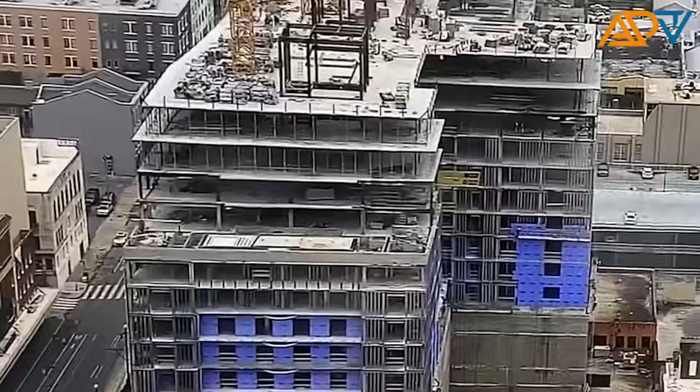Faulty constructions that cause severe disasters for people. Because of the negligence and corruption of those in the government, incidents like these are unavoidable. And what's even more horrifying is that it claims many lives.

In this video, I will show you the biggest construction failures in the world. Here, you'll see a building that was expected to last for hundreds of years, but suddenly collapsed in just a few seconds. You will also see bridges that everyone thought were safe, but suddenly gave way in the middle of rush hour. And that's just some of what you'll witness.

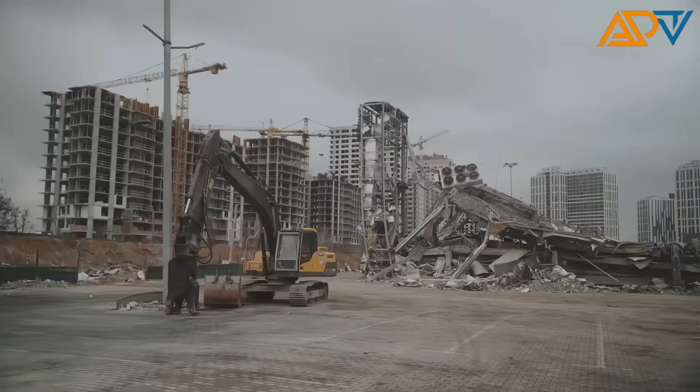Because of this, we've prepared a lot of entries about construction failures.

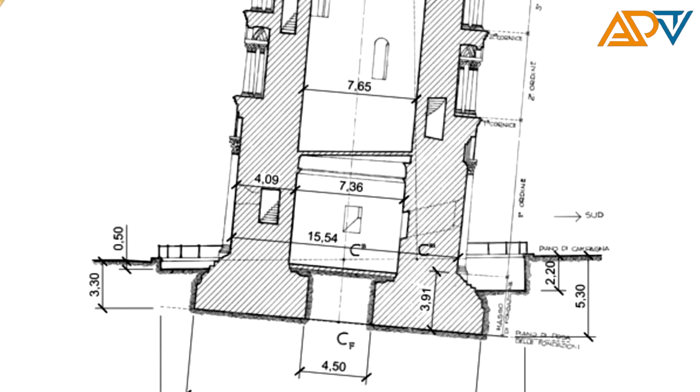That's when the tower started to lean. And even before it was completely finished, the flaw was already obvious. It was tilted or leaning. Because of political unrest and the wars that happened, construction was halted for almost a century.

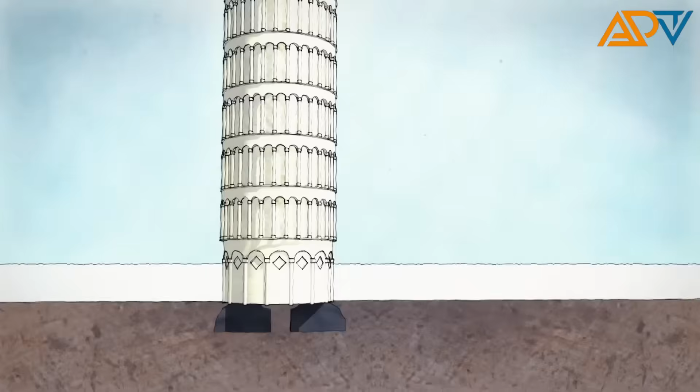And in a way, this actually helped. The ground had time to gradually settle. That's why the tower didn't collapse right away. But as construction continued, the tilt actually got worse.

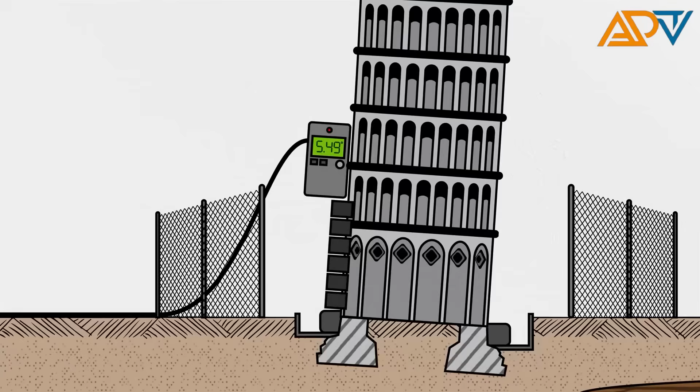In 1372, after almost 2 centuries, the tower was finally completed. But it was no longer straight. It now had a permanent tilt that became its trademark. As centuries passed, the angle of its tilt became even deeper.

Experts have tried several times to fix and stabilize the structure. There was major restoration until the 1990s. Starting in 1993 and lasting until 2001, they used modern engineering techniques to reduce the tilt and ensure that it would not completely collapse. As a result, what was once considered a major failure became an extraordinary symbol of Italy.

Imagine, a construction mistake is now visited by millions of tourists every year. The Leaning Tower of Pisa reminds us that even the mistakes of the past can become masterpieces in the present, admired by the whole world.

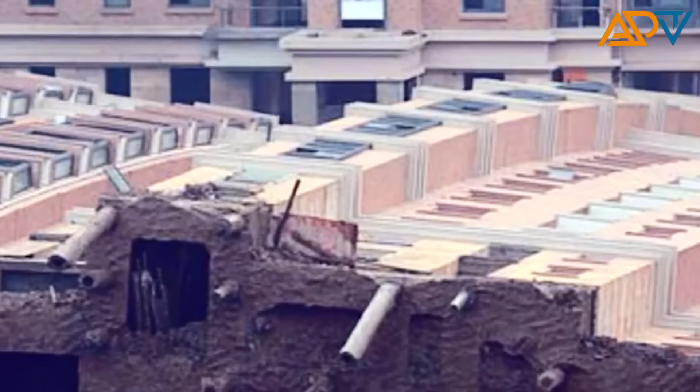Lotus Riverside Complex, Shanghai. In 2009, one of the most dramatic construction failures in modern history made headlines around the world: the collapse of a building at the Lotus Riverside Complex in Shanghai. It was like a giant domino slowly toppling over, shocking and terrifying.

The Lotus Riverside Complex was built as a symbol of China's modern urban progress. Sleek and tall buildings were planned to serve as homes for the middle class and families seeking a new life in the city. But on June 27, 2009, one of the high-rise buildings suddenly collapsed.

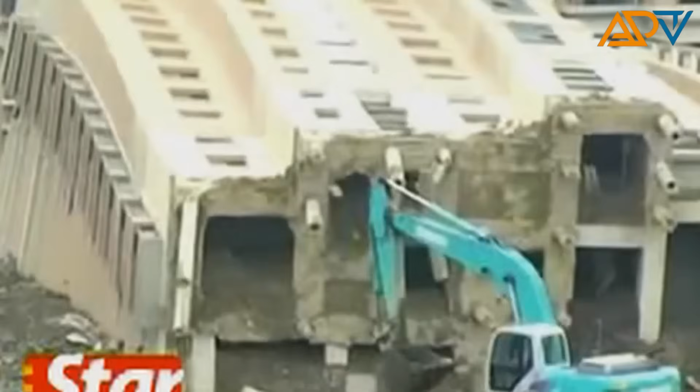What's chilling is that there was no earthquake, no typhoon, no natural disaster. Purely human error and negligence were the real causes.

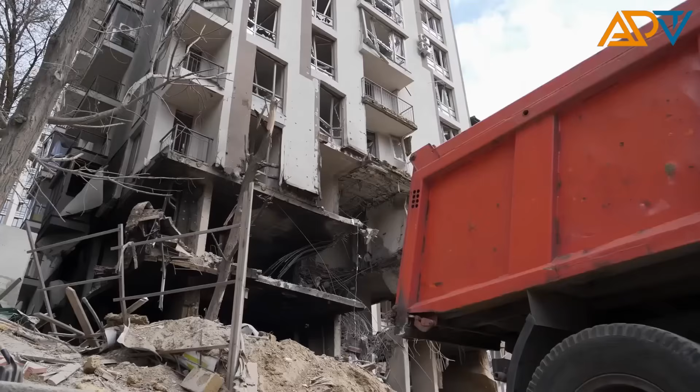It all started with the excavation for the complex's underground garage. As the massive amount of soil was being removed, the foundation gradually weakened. And because the building was already standing on unstable ground, it became even more problematic. It was like pulling the support out from under a giant pillar.

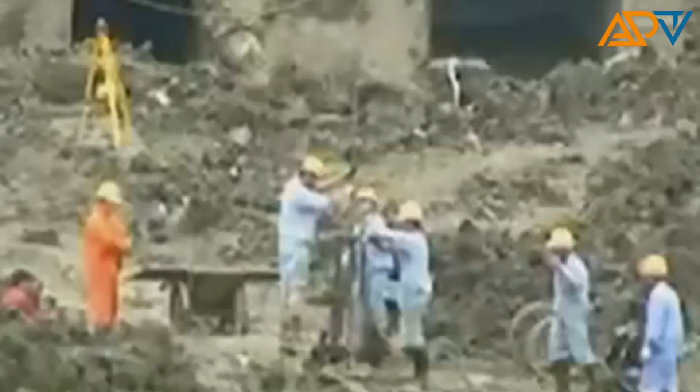Add to that the heavy rain before the incident, which soaked and softened the ground. That's why the foundation couldn't support the building's weight, until the moment came when the ground gave way and the entire building tilted.

Surprisingly, the building remained intact. It didn't break apart as expected. It was like a huge box that had been toppled over, but it was clear that its contents and integrity were already destroyed. Although only a few people died directly, the collapse of this building caused great alarm.

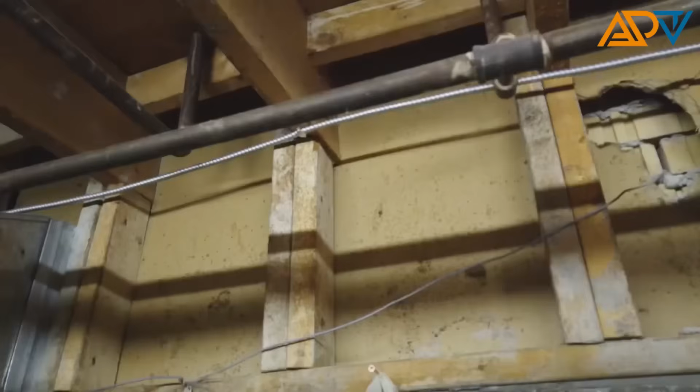This served as a strong warning against rapid and reckless urban development, especially in places like Shanghai, which are filled with high-rise projects. From that incident, Lotus Riverside became a symbol of the danger that when speed is prioritized over quality and safety, disaster will be the result. It's a clear reminder: a building, no matter how beautiful, is just a giant trap if the design isn't careful and the foundation isn't strong.

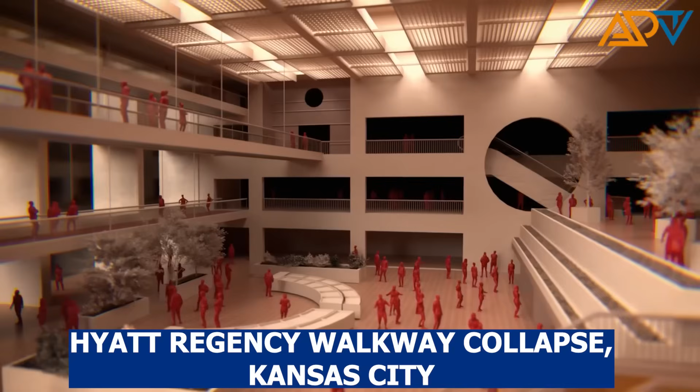Hyatt Regency Walkway collapse, Kansas City. On the night of July 17, 1981, the Hyatt Regency Hotel in Kansas City witnessed one of the worst structural failure tragedies in American history. Instead of being a place of fun and dancing, that hotel suddenly turned into a nightmare that claimed more than 100 lives. The Hyatt Regency was once a source of pride because of its grand lobby and modern design.

Its main attraction was the two suspended walkways hanging in the air, connected from the second floor and fourth floor, floating above the ballroom where parties and dances were held. It was like an architectural statement that showcased the skill and ambition of the designers.

But that night, while hundreds of people were dancing and celebrating, the walkways suddenly collapsed. In an instant, the two steel and concrete bridges collapsed, falling straight onto the people celebrating below. The once lively music was replaced by loud screams and the crashing of steel and concrete. More than 114 people died and over 200 more were injured. Many of them suffered severe injuries. Because of the number of victims, this was considered one of the deadliest building collapses in modern America.

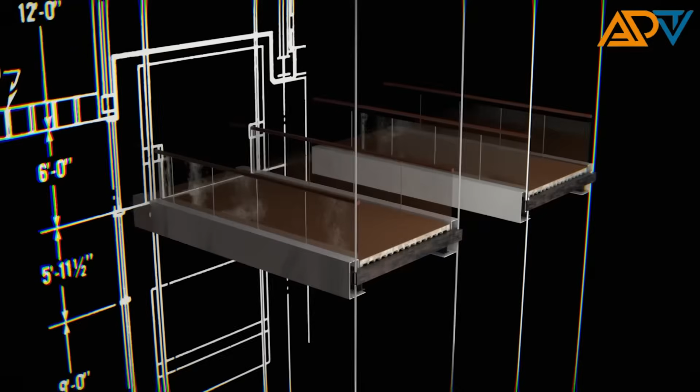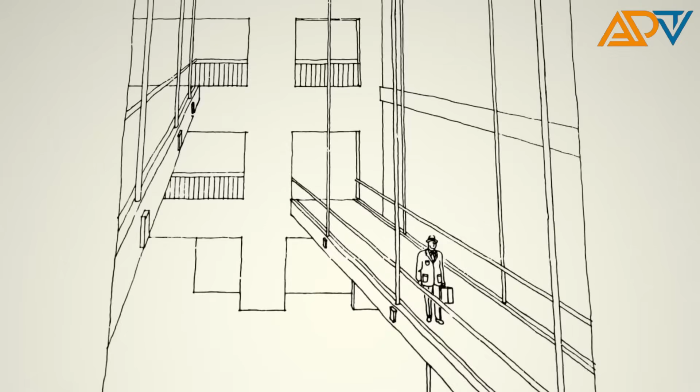When experts examined it, they found that a seemingly small but very significant design flaw was the root cause of the tragedy. In the original plan, only one set of hanger rods would be used to simultaneously support the walkways. But while the project was being built, this was changed, and the supports for the second floor and fourth floor walkways were separated. The problem was the weight that the connection points had to carry was doubled, a load they couldn't handle. In the end, they gave way and brought down the entire structure.

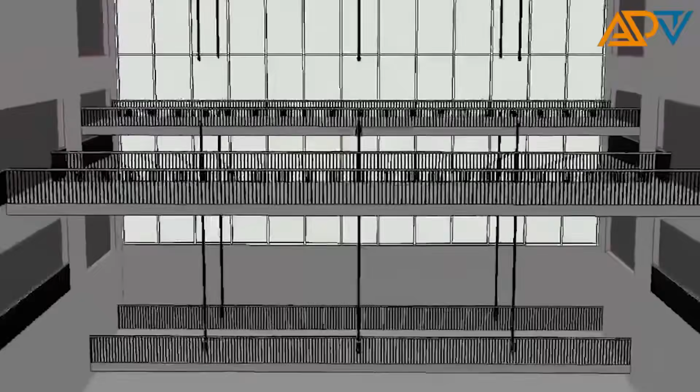What happened was not just an accident. It was a lesson that opened the eyes of the entire construction and engineering industry. It showed that no matter how beautiful or ambitious the design is, if the proper process and safety are neglected, it can lead to serious disaster.

The giant tank that suddenly exploded. Imagine a hotel lobby that looks like an actual aquarium. In the middle of it, there's a very tall cylinder tank filled with colorful tropical fish. That's the Aquadome in Berlin, an architectural masterpiece that became one of the most famous attractions in the city.

Built inside the Radisson Blu Hotel, it stands nearly 82 feet tall. Made from thick acrylic, it can hold millions of liters of water and more than 1,500 tropical fish. The hotel's elevator itself passes through the middle of the tank, so anyone riding it feels as if they're sinking under the sea. Every year, thousands of tourists and locals visit this place. For many, this symbolizes Berlin's modern innovation and unique design.

But in December 2022, the unexpected suddenly happened. In the middle of the night, without warning, the entire tank exploded. Millions of liters of water suddenly erupted. It caused widespread flooding in the hotel and nearby roads. The area was filled with water and debris, and the damage reached millions of dollars. The saddest part is that hundreds of tropical fish died in the incident. The scene that was once full of color and life was replaced by chaos and destruction.

But what was the real cause of the tragedy? Not an earthquake, not an explosion, but a structural weakness, right in the materials of the aquarium itself. Over time, the acrylic used in the tank wall developed micro-fractures, tiny cracks that are almost invisible to the eye. The changes in temperature and the intense water pressure accelerated its deterioration until it finally gave way. The Aquadome, once considered a masterpiece of modern design, suddenly became a reminder that no matter how beautiful and impressive a project is, if the materials are not strong and safe, it can end in disaster.

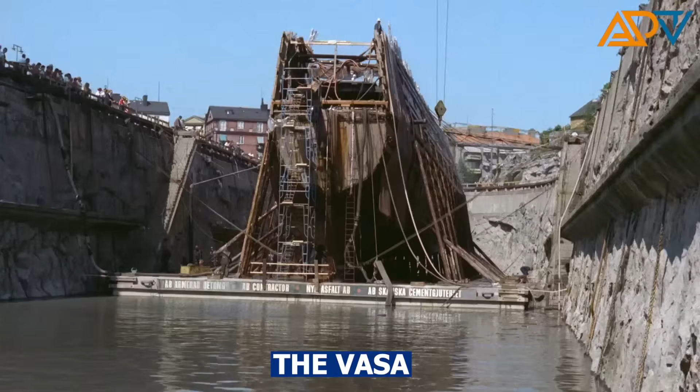The Vasa, the warship that sank on its maiden voyage. If there's an example of a massive project wrapped in ambition but struck by tragedy, nothing beats Sweden's Vasa ship. During the time of King Gustavus Adolphus, the Vasa was built as a symbol of the power of the Swedish Navy.

It was supposed to be the most powerful warship of its time, filled with cannons, with a tall structure designed to strike fear into the enemy.

But in August 1628, on its very first voyage from the port of Stockholm, the unexpected happened. The ship had barely traveled a mile when it suddenly tilted and sank. The magnificent ship didn't even make it to the open sea—right there near the shore, tragedy struck and took it away.

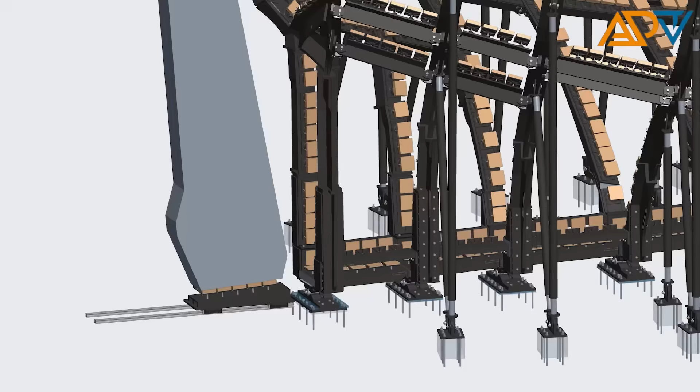The problem was the ship's very design. The upper part was too heavy because of the numerous cannons and decorations, while the lower part lacked ballast, the weight that should have served as a counterbalance. A strong gust of wind was all it took to tip the balance, and that was the end of Vasa.

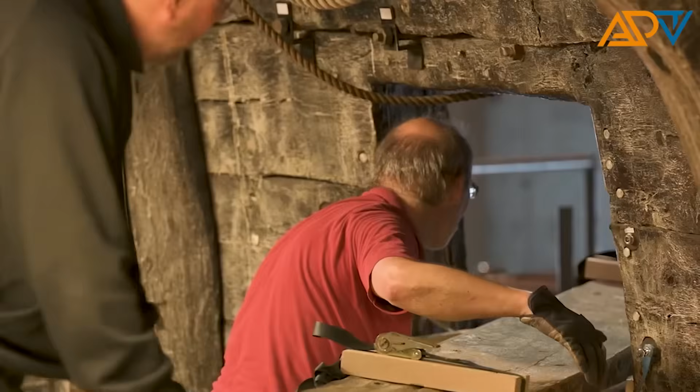In just a few minutes, the ship that the whole country was proud of sank, along with the lives of dozens of crew members on board. This incident became a vivid example of how great the consequences can be when basic engineering principles are ignored in favor of luxury and showmanship.

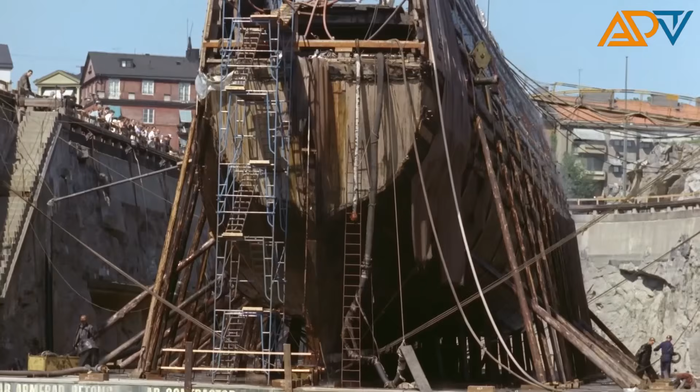The Vasa remained underwater for more than 300 years, and in 1961 it was raised again and carefully preserved. Today it can be seen in a museum in Stockholm, not as a symbol of military strength, but as a reminder of the importance of proper design, safety, and balance in any project.

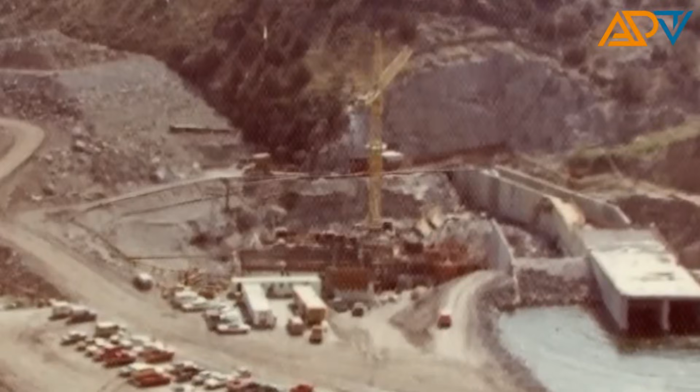The Teton Dam: the stream that became a deluge. In the 1970s, the United States proudly introduced a new project, the Teton Dam in Idaho. It was designed to prevent flooding, provide irrigation, and supply water to surrounding communities. It was said to be modern and state-of-the-art for its time.

But on June 5, 1976, everything changed. As the reservoir was being filled for the very first time, small water leakages were noticed in the dam. At first, it seemed like it could still be controlled. The engineers tried to fill and fix it, but the problem was quickly getting worse.

Just a few hours later, the Teton Dam gave way. A giant gap formed, and more than 250,000 acre-feet of water gushed out. A massive flood surged straight toward the towns of Wilford and Rexburg, like a giant wall of water that destroyed houses, farms, bridges, and roads.

Almost all the properties in its path were submerged or swept away. Unfortunately, 11 people died, and the damage left behind amounted to billions of dollars. Even nature was not spared, as livestock and vast farmlands were swept away by the raging flood.

The root of the tragedy? Experts discovered that the dam was built using extremely porous rocks that easily let water in. It gradually weakened from the inside until it finally collapsed. The Teton Dam is a harsh lesson that no matter how good the plan is, if there are flaws in the materials and warnings are ignored, a project that is supposed to provide security can actually become the source of one of the worst disasters.

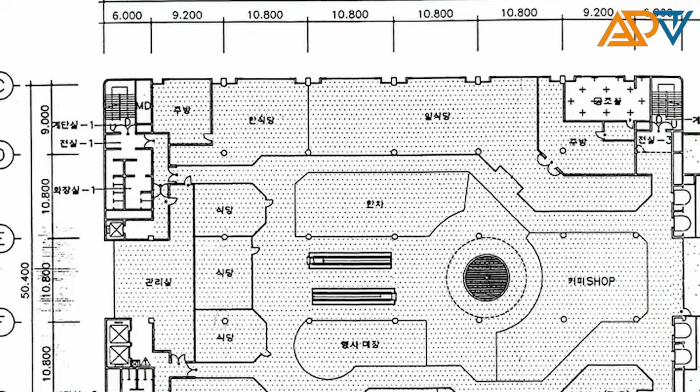But behind its shiny image, there was a hidden grave mistake. The building was originally designed as a 4-story office, but while it was being built, the owners decided to turn it into a 5-story shopping mall. Because of this, some important columns were removed and heavy facilities like a huge air conditioning unit were added to the roof, which the foundation couldn't support.

Warnings appeared even before the disaster. For several months, large cracks appeared on the walls and floors. But instead of closing the building for repairs, the management chose to continue operations because they didn't want to lose income. And then the worst moment came: June 29, 1995.

While the mall was full of shoppers, a loud rumbling sound suddenly occurred. The floors collapsed one after another, like a house made of cards. In just a few minutes, the entire building disappeared under its own weight. More than 500 people died and almost 1,000 were injured.

This made it one of the deadliest disasters of a collapsed building in modern history. Investigation revealed the cause was poor planning, design violations, and excessive cost-cutting.

The businessmen increased profits, even at the cost of thousands of lives. Today, the Sampoong department store collapse remains a dark reminder. In the world of construction, when greed comes before safety, what you reap is not profit, but tragedy.

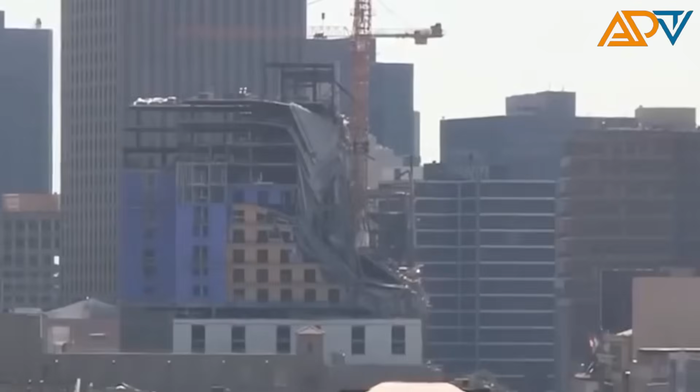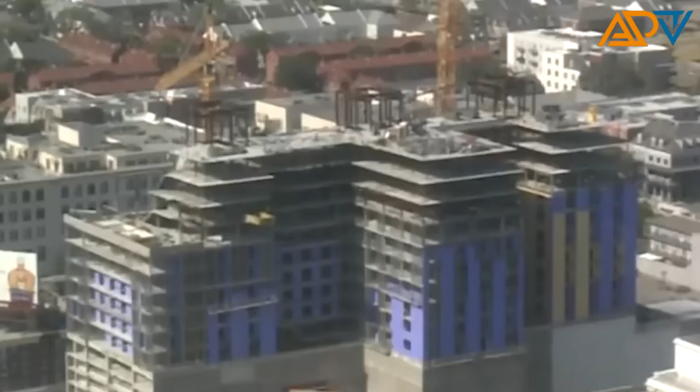Hard Rock Hotel collapse: luxury that ended in tragedy. At first, the Hard Rock Hotel in New Orleans was promised to be a new symbol of luxury in the city. It had plans for a rooftop bar, a swimming pool with a view of the skyline, and 5-star amenities for guests. Since construction began in 2018, residents and business owners were filled with excitement. They were looking forward to the completion of the new landmark, but instead of a grand opening, a nightmare happened.

On October 12, 2019, a few months before the scheduled inauguration, the upper floor of the building suddenly collapsed. It collapsed downward, swallowing the lower part, and left a pile of steel and concrete. 3 workers died, many were injured, and the entire city was stunned.

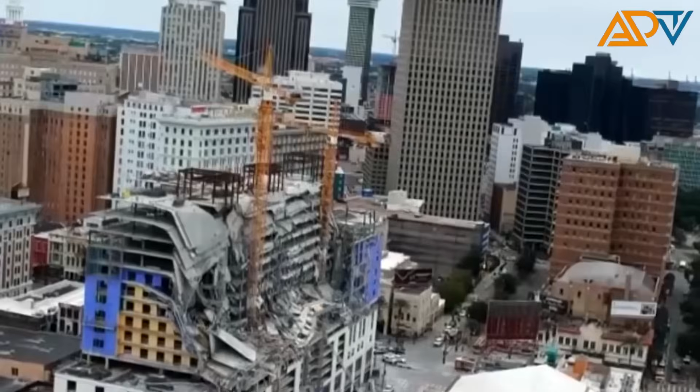When the cause was investigated, it turned out there was a major error in the design and construction. In an effort to cut costs, thinner steel beams were used on the 16th and 17th floors. These steel beams were not enough to support the weight of the structure being built. As time passed and more materials were added, the weight gradually caused it to give way until it eventually collapsed. It was also found that oversight and safety protocols were lacking, meaning inspections were insufficient and many warnings were ignored.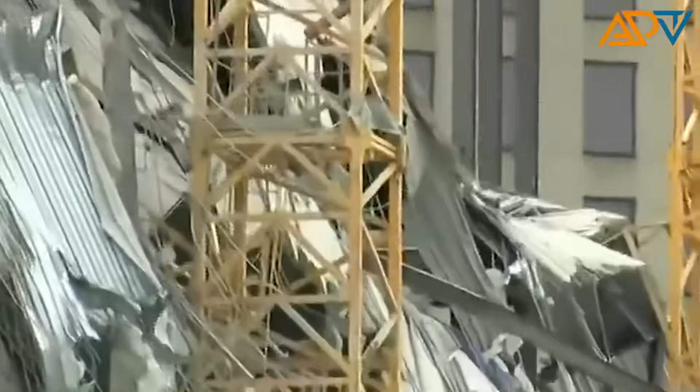The Hard Rock Hotel tragedy became a harsh lesson for the construction industry, showing that cutting corners in the wrong way can result in the loss of lives. Instead of becoming a symbol of luxury and success, it became a monument to negligence.

Walkie-talkie skyscraper. In 2014, a new skyscraper in London made headlines for a strange problem. It is known as the Walkie-talkie building because of its shape, which resembles a handheld radio. At first glance, the architecture is impressive, modern, unique, and instantly recognizable in the city skyline. But there is an unexpected flaw.

Its concave glass shape acts like a giant magnifying glass. Whenever sunlight hits it, the light reflects and goes in a single direction, directly onto the street below. The result is, it feels like you're under an industrial oven. There were even times when the heat on the street itself reached over 243 degrees Fahrenheit.

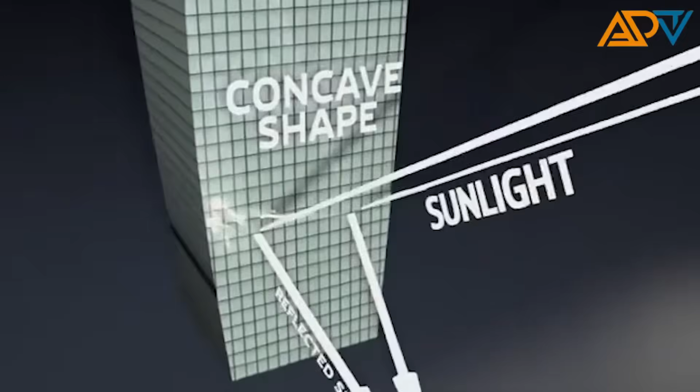A Jaguar car literally had parts of its body melt because of the extreme heat. Street signs burned, tiles warped, and even pedestrians complained because they felt like they were being cooked while walking. Because of this, people in London called it the fry scraper.

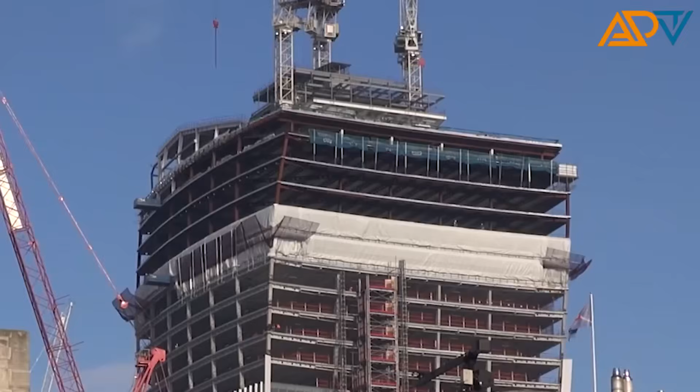The developers were forced to come up with an immediate solution. They installed sunshades to reduce the glare and prevent dangerous heat. But before this could be done, this building became a vivid reminder that even the most ambitious designs can lead to unexpected disasters when its impact on the environment is not taken into consideration. In the end, the walkie-talkie became an example of how an architectural marvel can pose real-life dangers when simple scientific principles are overlooked.

Tacoma Narrows Bridge, known for collapsing after swaying dramatically. On November 7, 1940, all of America witnessed one of the most famous mistakes in the history of engineering: the collapse of the Tacoma Narrows Bridge in Washington state.

It was known as Galloping Gertie because of the unusual movement of the bridge whenever there were strong winds. It literally moved like a wave in the sea. The bridge was built to be modern and cost-effective. The design was sleek, lighter than earlier suspension bridges, and considered a masterpiece of modern architecture.

But there was a major problem: it was too aerodynamic. Instead of withstanding the wind, the structure acted like an airplane wing, catching the wind and oscillating. On the day of the tragedy, the wind hit almost 40 miles per hour. At first, the bridge twisted and vibrated, but as the wind grew stronger, its movement became even more dangerous.

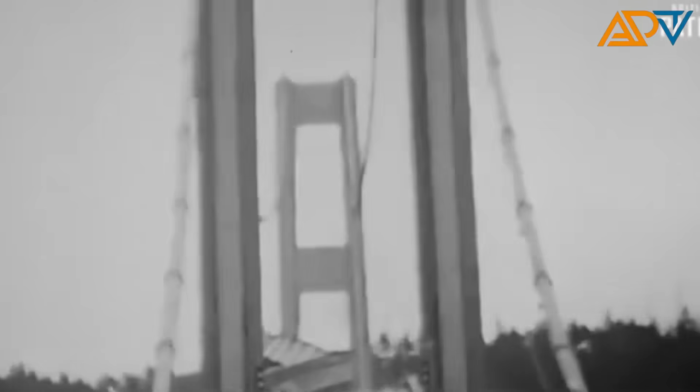The motorists passing by were terrified. They fled immediately, leaving behind a car with a dog, which became a symbol of the tragedy. After several hours of intense oscillation, the structure could no longer withstand the continuous twisting. In front of cameras and witnesses, the bridge finally collapsed and plunged into the cold waters of Puget Sound.

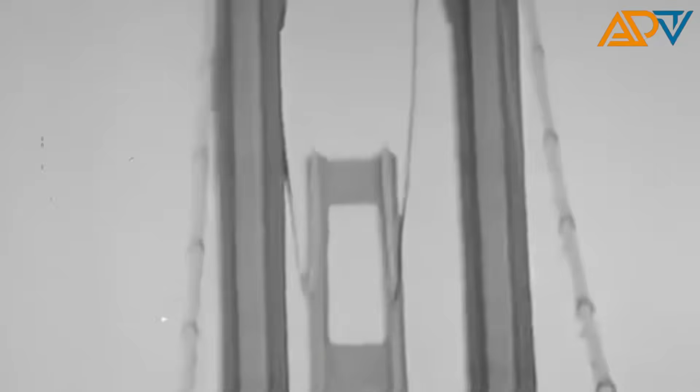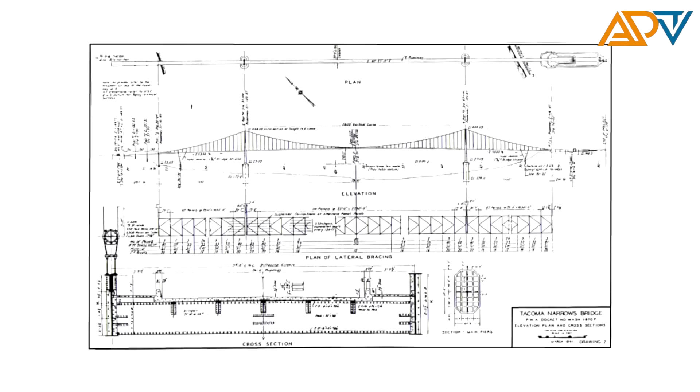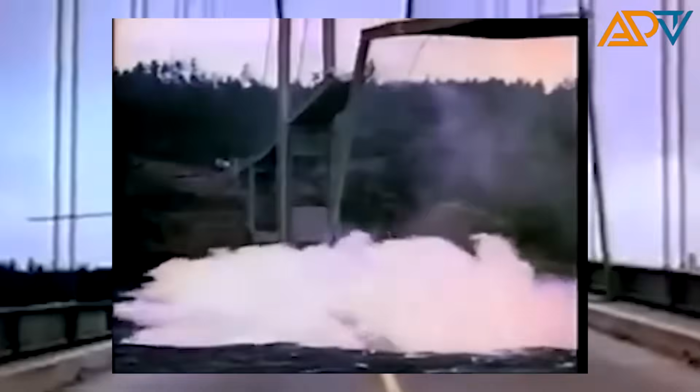The collapse of the Tacoma Narrows was not just a local disaster, but a major lesson for the entire world of engineering. Scientists realized that their study of the effects of aerodynamics on large structures was lacking. Because of this, a new discipline in civil engineering emerged that focused on wind resistance and structural stability. Today, the tragedy of Galloping Gertie is recorded not only as a failure, but also as an important turning point that changed the way bridges are designed around the world.

Aon Center Marble Crisis. In 1973, the Aon Center was built in Chicago, then known as the Standard Oil Building. It was a modern skyscraper with a slick design wrapped in white Italian Carrara marble, a material that has long been a symbol of luxury and beauty. For the architects, this marble would give the building a unique identity. But within just a year, problems began to emerge.

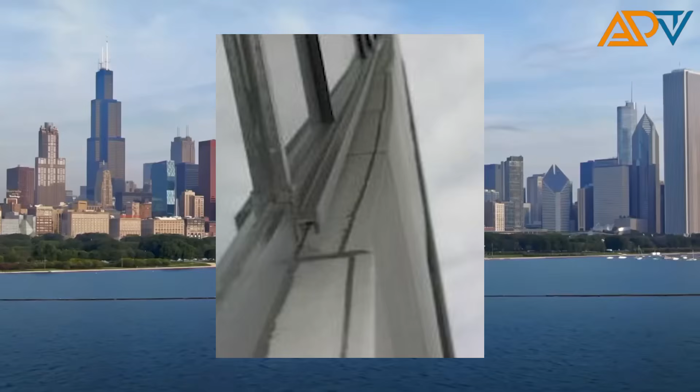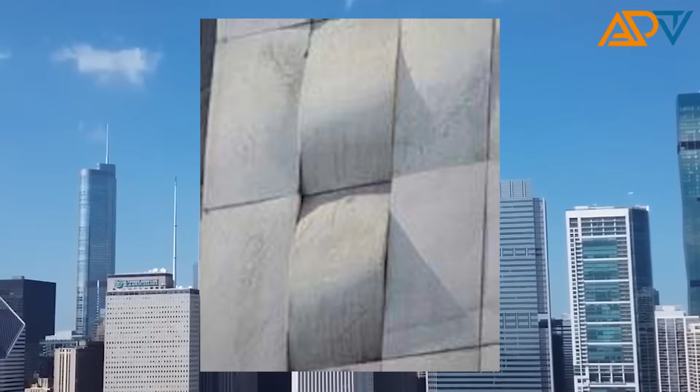The marble panels on the outside of the building showed deep cracks, and some even detached and fell from above. Just imagine blocks of stone weighing over 300 pounds falling from the sky, a huge threat to people passing by on the street below. What caused it? The answer is Chicago's extreme climate.

In this city, people experience extreme heat during summer and intense cold in winter. Because of this, the marble repeatedly expands and contracts. Over time, the thin slabs could no longer withstand the stress from the changing temperatures. Many times, they tried to fix the problem using metal reinforcements, but this did not resolve the issue. In the end, the building owners were forced to remove all the marble panels and replace them with stronger granite from Mount Airy. The project cost over $80 million, almost half the original value of the entire building.

The Aon Center marble crisis served as a major lesson in the world of architecture. Beauty is not enough if it doesn't fit the environment. It showed that no matter how expensive or famous the materials are, if they are not suitable for the conditions of the place, they can cause tragedy and enormous costs. Until now, the building is still standing, but behind its sturdy granite remains the story of one of the most expensive mistakes in the history of modern construction.

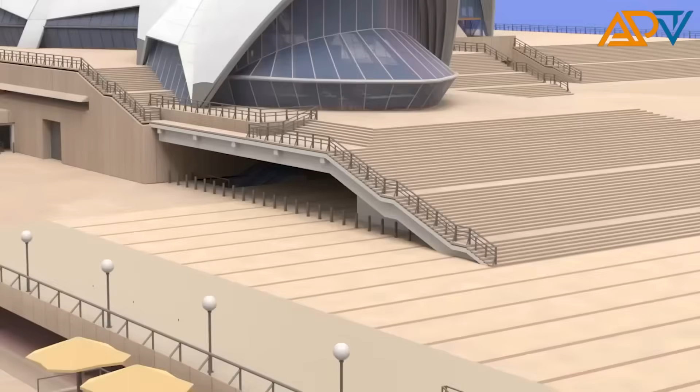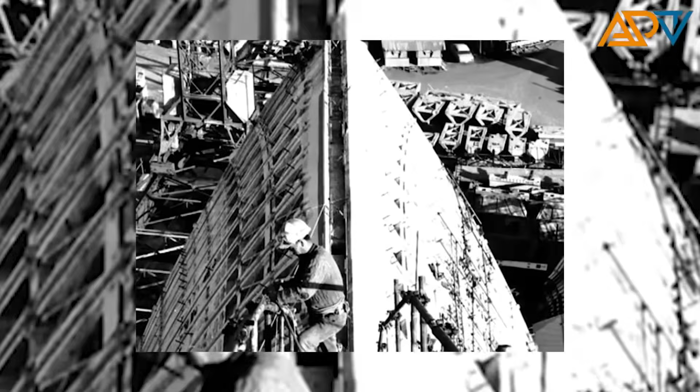In 1957, the Danish architect Jørn Utzon won a competition to design the building. The plan was simple: it would be finished within 4 years, and the total cost would be 7 million Australian dollars. But over time, it became clear events were far from expected. The unique design of the Opera House, especially the iconic concrete shells, brought almost endless engineering problems. It was repeatedly redesigned during construction, and each change added years and millions in costs.

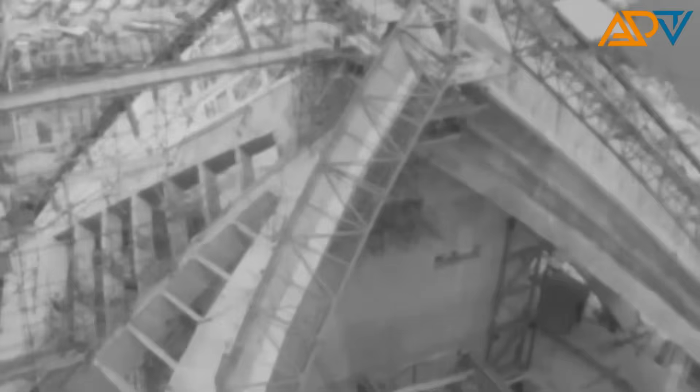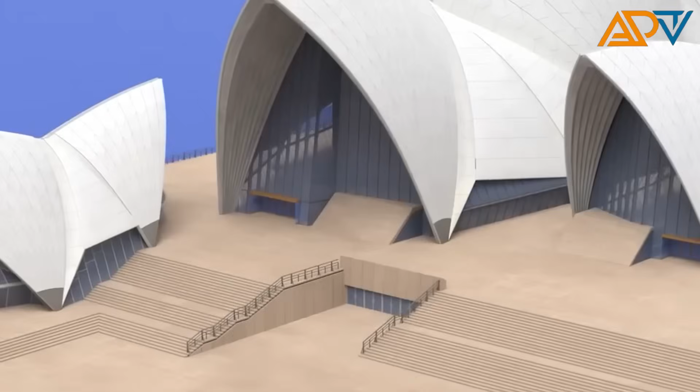The problems weren't just about money. When the building opened, the poor acoustics inside were immediately noticed. For a building meant for music and opera, this was the most painful mistake. Many performers complained that the sound was hard to hear, and the design was not suitable for performances. Because of this, they had to spend almost 300 million Australian dollars for renovations in the following decades. The acoustics were improved, new panels were added, and the interior was renovated to live up to the building's reputation.

Today, the Sydney Opera House is still recognized as a UNESCO World Heritage Site and a symbol of Australia. But its true story serves as a warning: excessive ambition and the desire to create something unique can lead to extreme delays, excessive costs, and great disappointment before finally achieving success.